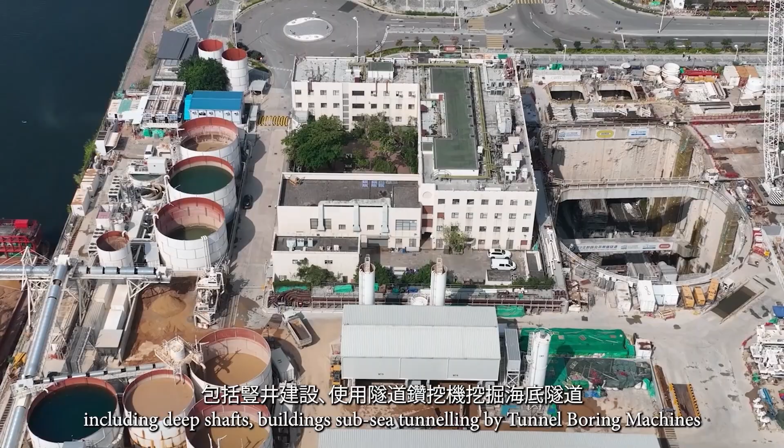The T2 project comprises 3.4 kilometers of dual tunnels and 2 ventilation buildings. It is complicated, involving a multitude of work types, including deep shafts, buildings, subsea tunneling by tunnel boring machines, and drill and blast, drill and break mined tunnels.

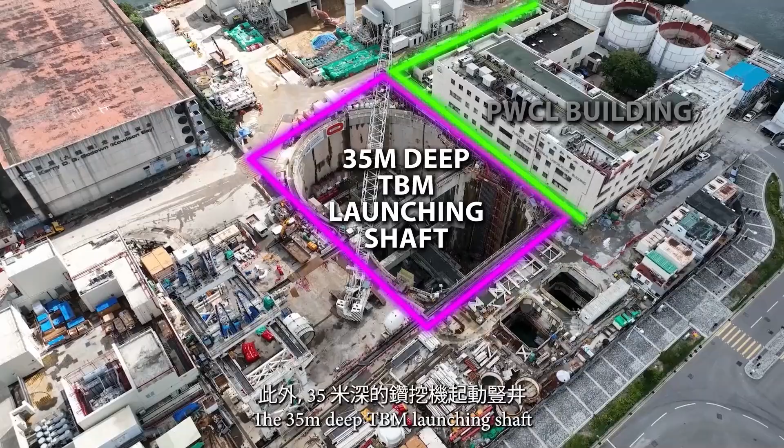It is also hugely challenging. The 35-meter deep TBM launching shaft is located less than 2.5 meters away from the friction piles of the highly sensitive Public Works Central Laboratory, and the mine tunnels are routed right under the sensitive Cha Kwo Ling village.

Traditionally, tunnel construction involves various in-situ works, like the concreting for the road deck, ventilation compartments, cross passages, and the like. These require intensive labor and plant resources in a congested tunnel environment, posing significant safety risks and logistic constraints.

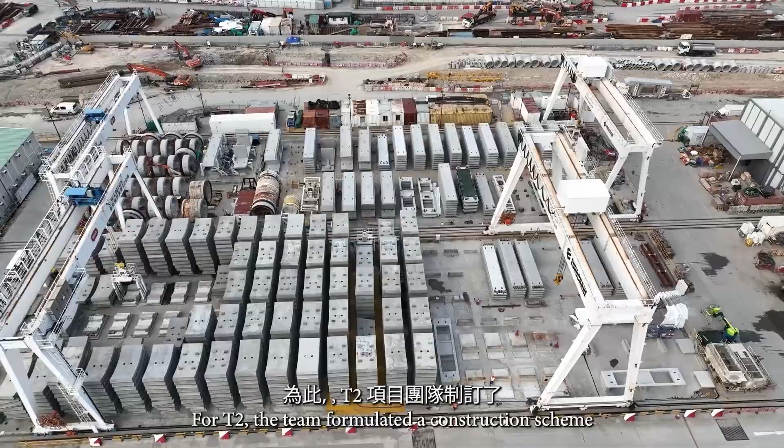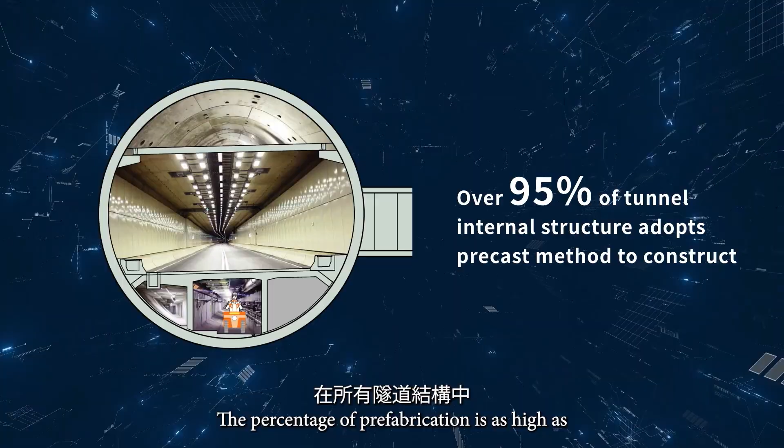For T2, the team formulated a construction scheme with a high degree of modularization. This is coupled with design for manufacturing and assembly, and fully mechanized and robotic construction. The percentage of prefabrication is as high as 95% of all the tunnel structures. Electrical and mechanical services are also installed in a modular manner through MIMEP.

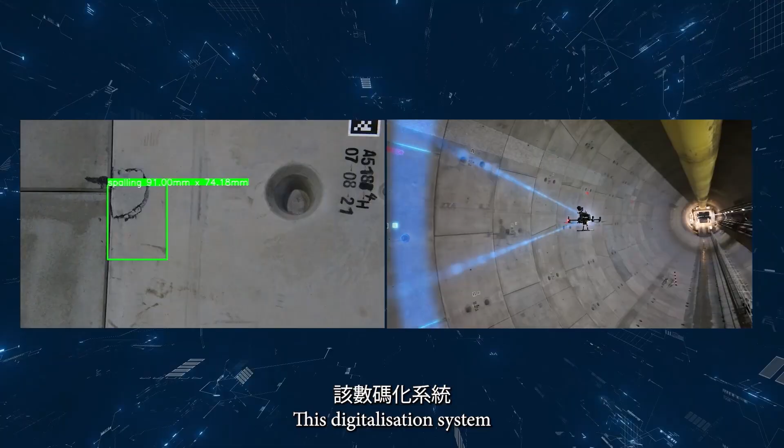In tandem, the project team sought out and integrated a range of smart and latest technologies to constitute a comprehensive digitalization system. This digitalization system and the extensive modularization work together synergistically to benefit not just the project delivery stage of design and construction, but also future operation as well as asset management and maintenance.

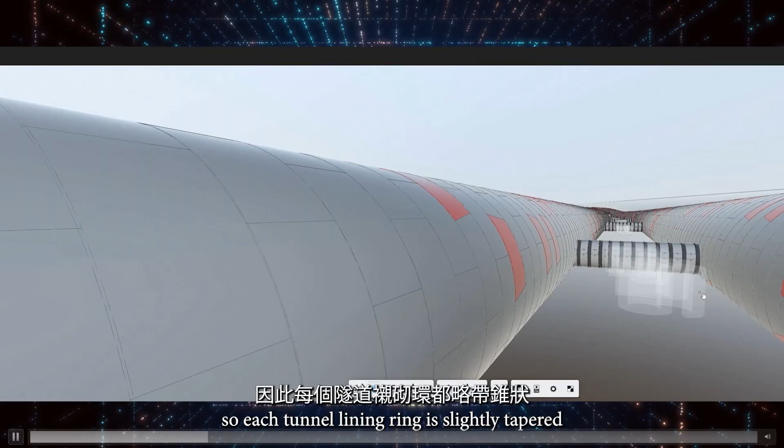First, let's look at how the digitalization system utilizes the digital twin for smart alignment control and clash-proofing of tunnel structures. Tunnel alignments are curvilinear, so each tunnel lining ring is slightly tapered. Change in tunnel direction is affected by relative taper orientations between 2 adjacent lining rings.

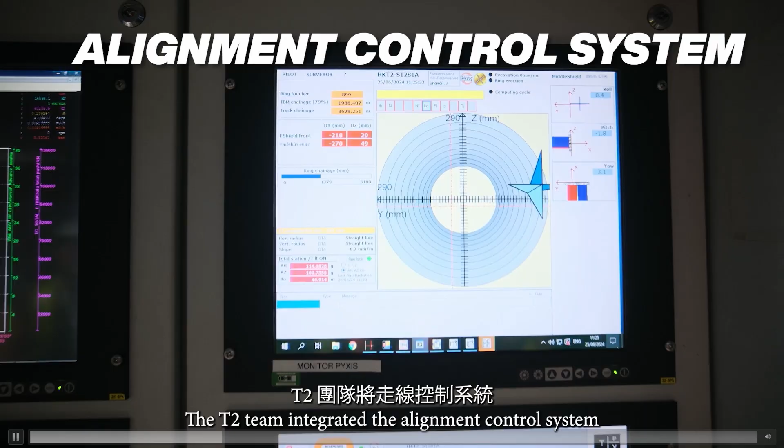The T2 team integrated the alignment control system and the BIM model to create the PYXIS Revit Python Dynamo automated design workflow. This automatically analyzes the as-built location of the latest installed lining ring and determines the appropriate relative taper orientation for the next ring.

Furthermore, it checks and affirms the spatial compatibility of tunnel internal structures to be installed in the latest erected tunnel ring, thereby eliminating the risk of spatial conflicts between the structures.

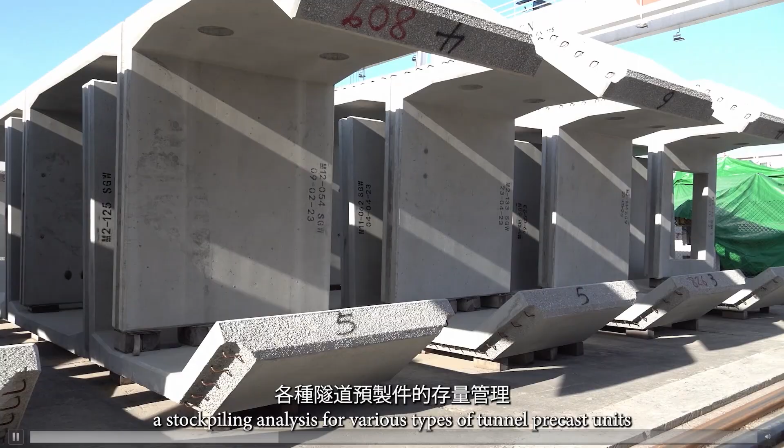Construction of tunnel internal structures are highly interlinked. The team developed a 4D Smart Progress program system integrating tunnel lining construction, a permit-to-load system for early-age concrete corbels, a stockpiling analysis for various types of tunnel precast units, and the MIMEP module tracking system.

By correlating data from the IoT, DWSS, and BIM model, the status of each major construction activity is visualized through the centralized management platform, whether it's ahead of, on schedule, or behind the latest approved program.

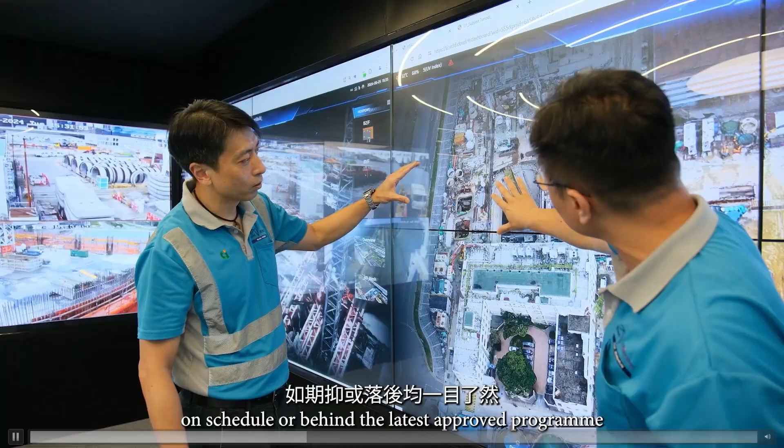Furthermore, the smart integrated system conducts analyses based on past progress to project upcoming works interfacing and resources requirements. To ensure efficiency, this avoids time loss due to supply shortages or inadequate preparedness.

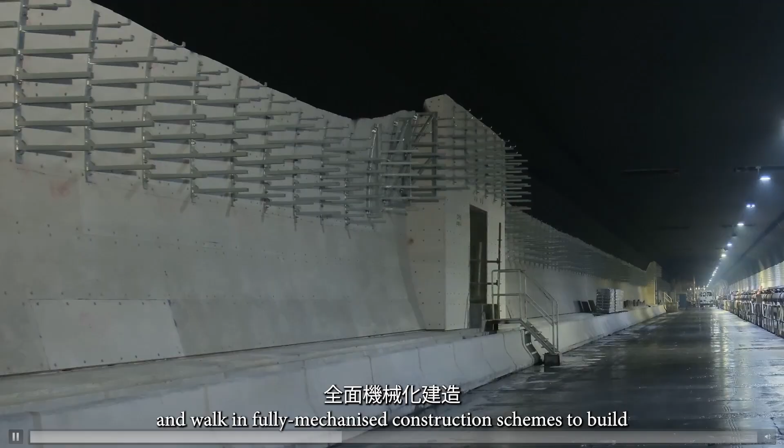The team leveraged the latest modular construction techniques and the design for manufacturing and assembly approach, and brought in fully mechanized construction schemes to build the road deck and service gallery structures, the overhead ventilation duct slabs and ventilation dampers, cross passages, and fire protection boards.

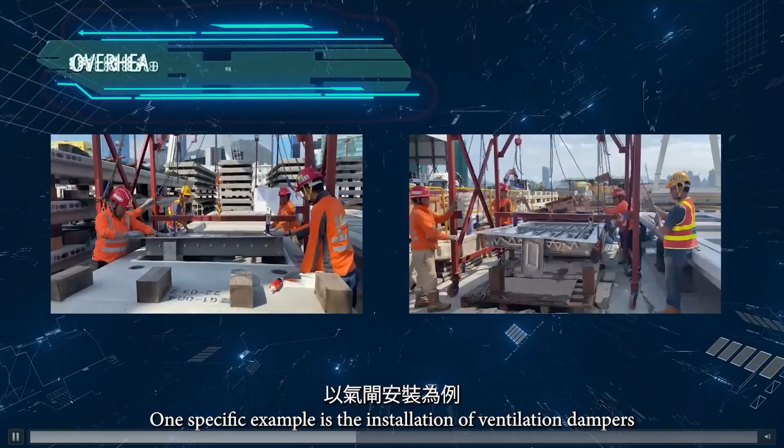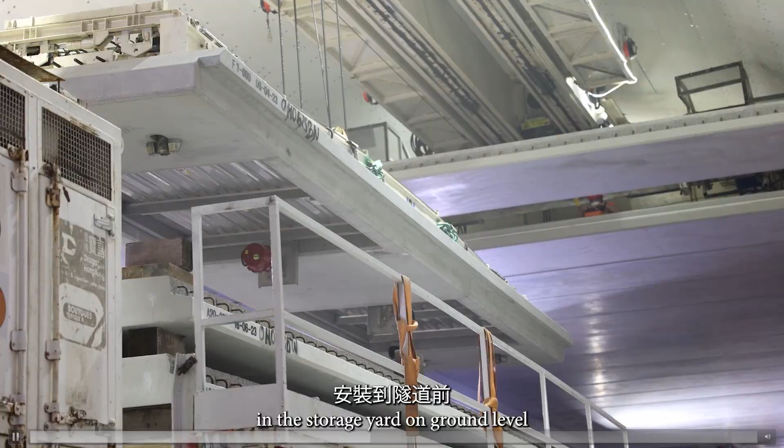One specific example is the installation of ventilation dampers. To minimize lifting and working at height risks, the dampers are pre-installed onto the slabs in the storage yard on ground level, before the slabs are lifted up and put in place in the tunnel.

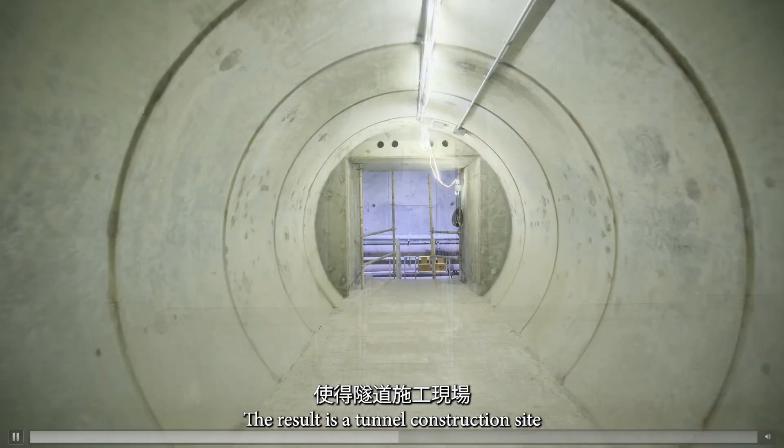These novel construction schemes empowered by the digitalization system increases the speed of individual construction activities and allow maximum concurrency of different work fronts along the tunnel, thus greatly enhancing productivity, site tidiness, and logistics. The result is a tunnel construction site that closely resembles a highly efficient industrial production line.

The BIM also allows construction method simulations before actual works take place to guard against any clash or conflict.

Occupational safety and health is always of paramount importance. To minimize working at heights and other such repetitive tasks, the team developed an innovative tunnel lining inspection technology called the 3S Tunnel Defect Inspector.

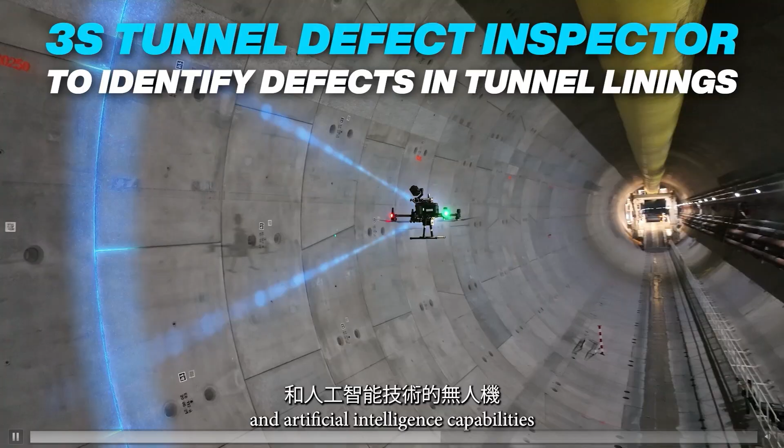This is a drone equipped with edge computing and artificial intelligence capabilities. It automatically identifies defects in the installed tunnel linings, like minor cracks, and uploads the full records including high-resolution photographs to the BIM model instantly to constitute precise digitalization of inspection records.

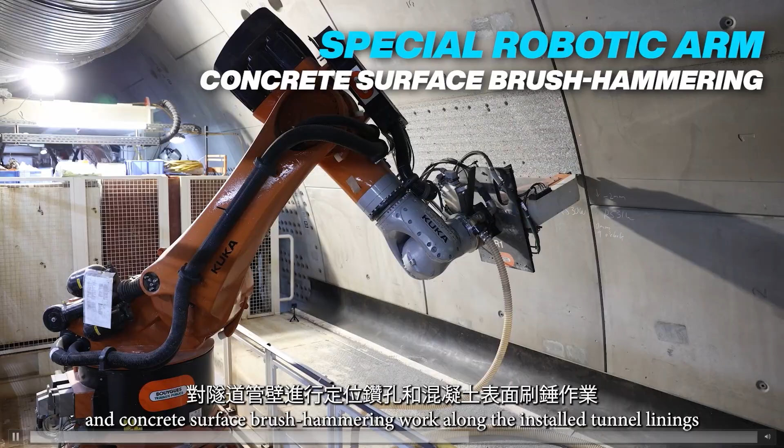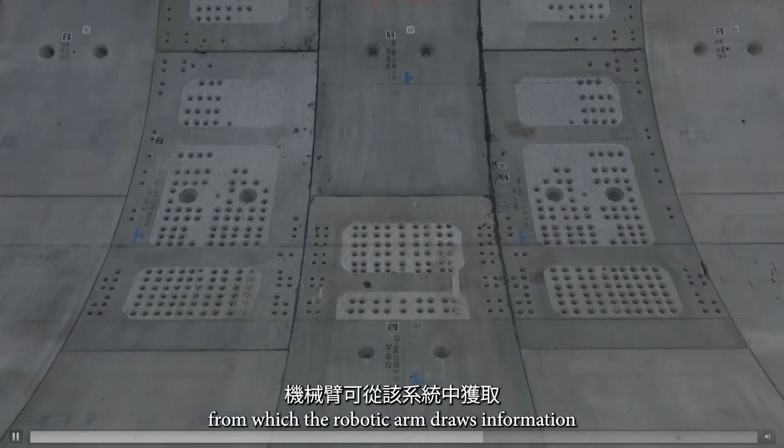Besides, the team brought in robotic construction for anchor bar hole drilling and concrete surface brush hammering work along the installed tunnel linings in preparation for corbel construction. This is enabled by the digitalization system, from which the robotic arm draws information about the location of the corbel. This digitalization-driven innovation once again eliminates the tedious manual work at heights.

Similar robots were designed for the drilling and installation of fixing bolts for MIMEP units of electrical and mechanical facilities, further enhancing work efficiency and safety.

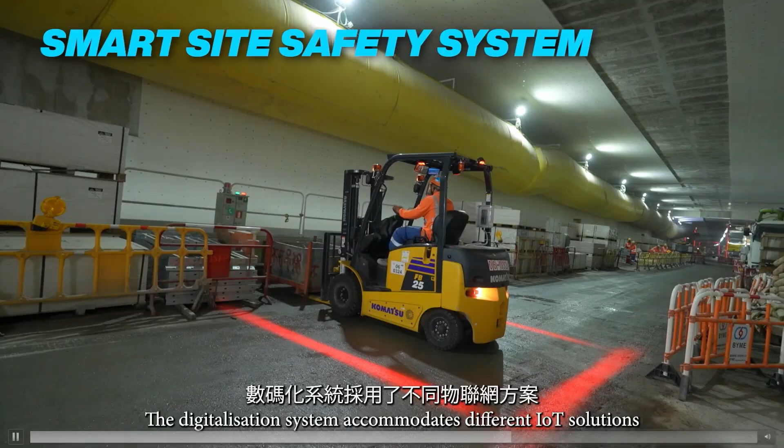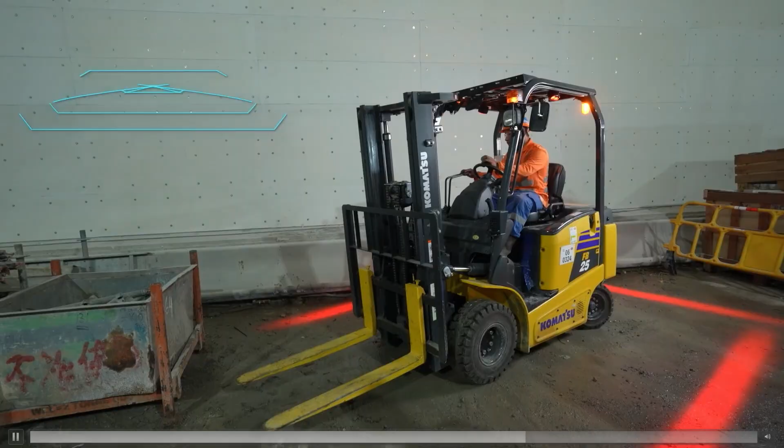The digitalization system accommodates different IoT solutions under the Smart Site Safety System, like AI cameras, smart tags, halo light for protection from moving plants, confined space monitoring, etc.

One particular measure is the Operator Biometric Authentication System that verifies biometric information of a plant operator remotely via the digitalization system to ensure he is an approved operator.

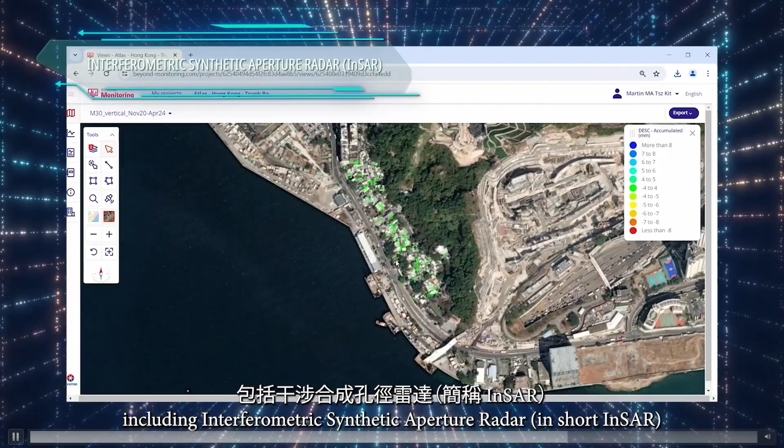As mentioned earlier, the T2 tunnels are routed extremely close to highly sensitive facilities. To ensure the effectiveness of impact mitigation measures, the team brought in remote sensing instrumentation technologies including interferometric synthetic aperture radar (InSAR), Global Navigation Satellite System, and 360-degree artificial intelligence noise monitoring. The information collected is fed into the digitalization system for continuous close monitoring.

Apart from providing continuous instrumentation and eliminating manual survey work, the clear digitalized records greatly facilitate communication with stakeholders, helping to foster mutual trust. The T2 project team leveraged the benefits of digitalization beyond project design and construction.

The aim is a digital twin of the whole tunnel, including both structures and equipment, that would greatly enhance operation, asset management, and maintenance. IoT sensors and multifunctional robots for preventative maintenance of various E&M services, energy consumption and efficiency monitoring, structural health monitoring, etc., are incorporated as part of the infrastructure to be handed over to the operation and maintenance parties. They are highly supportive of these initiatives.

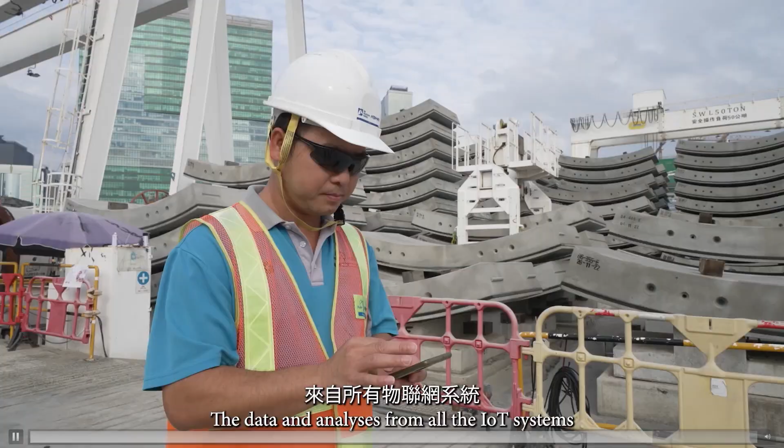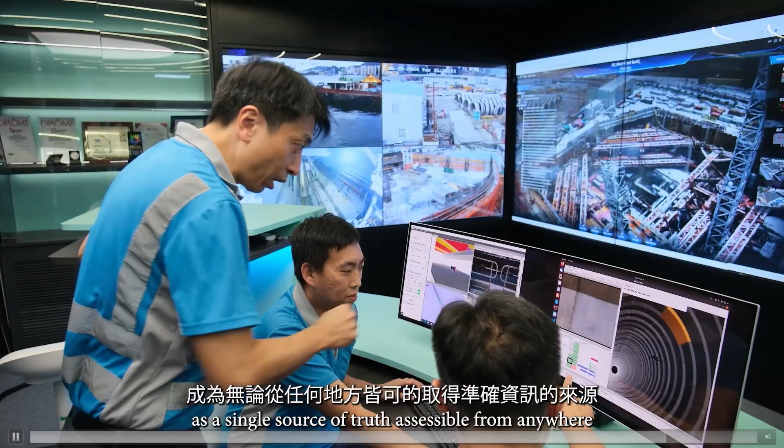The data and analyses from all IoT systems, BIM model, and DWSS are integrated into the web-based portal centralized management platform as a single source of truth accessible from anywhere, as well as feeding into the Development Bureau's ICWP for taking forward construction digitalization at the policy level.

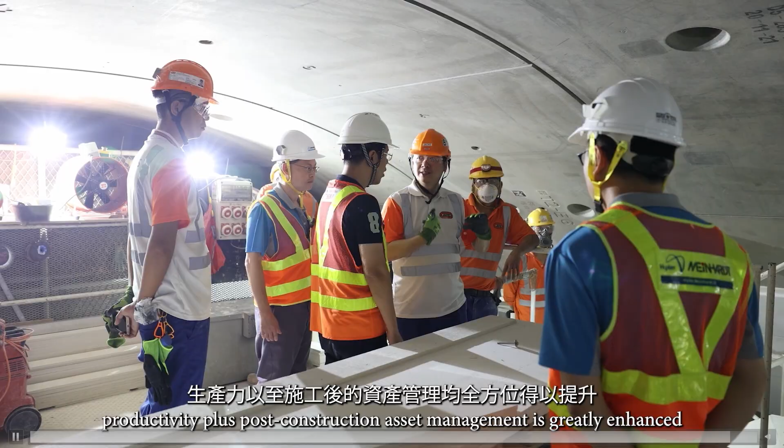In Trunk Road T2, we adopt various smart technologies. We've developed a truly comprehensive digitalization system. It enables the application of digital twin in numerous ways. In this project, the works are mostly delivered in modular units. Taken all together, project management, safety, quality, operational efficiency, productivity, plus post-construction asset management is greatly enhanced. CEDD will continue to leverage the benefits of construction digitalization. Surely, T2 will lead the way to take forward these worthwhile initiatives.

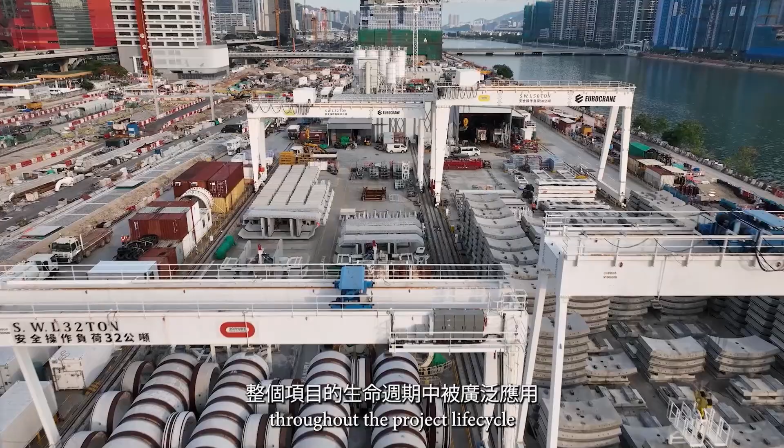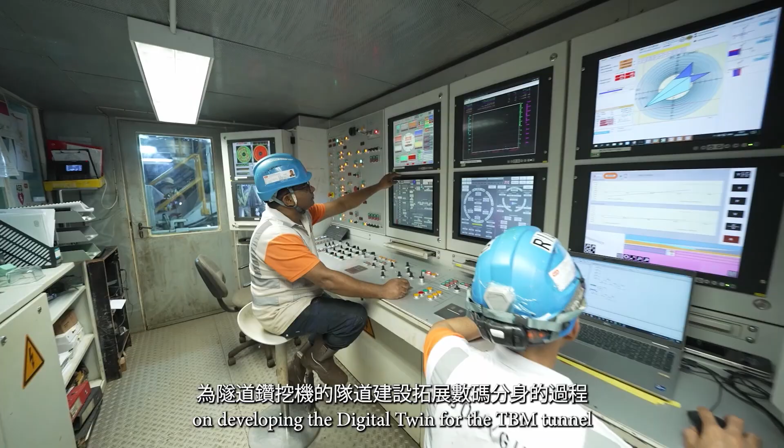This workflow is the key to achieve progressive as-built and projection of tunnel design and construction. We will also introduce the IoT solutions that reflect existing real-time conditions on site with visual analysis to assist making necessary timely decisions.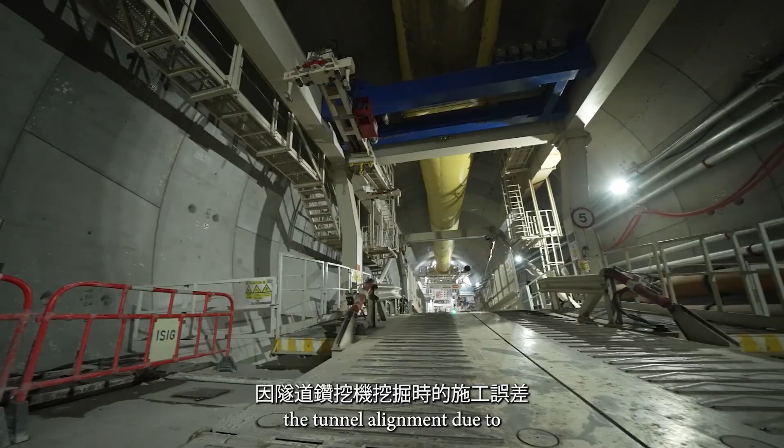At the design stage of the TBM tunnel lining, each tunnel ring was segmented into 9 sections. The position of the key segment K9 dictates the tunnel direction and can accommodate all curvatures in the tunnel. It also helps to adjust and correct the tunnel alignment due to the construction tolerance of TBM excavation.

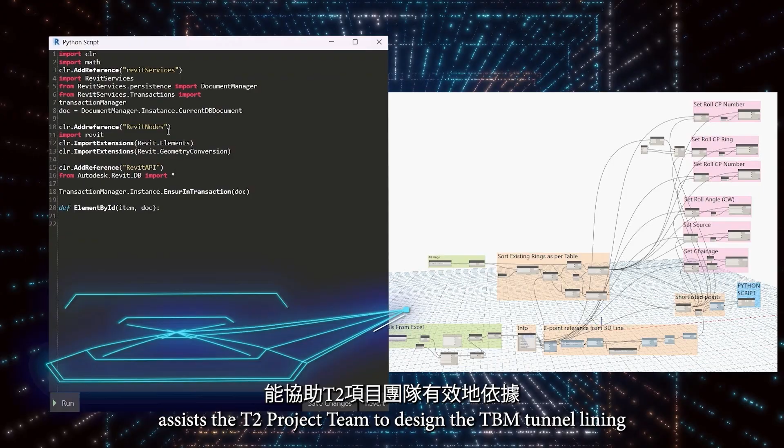With parametric constraints and boundary conditions, the parametric design with DynamoScript assists the T2 project team to design the TBM tunnel lining and its internal structures effectively, with reference to the design tunnel alignment. The design could be iterated easily and promptly by changing the design axis. The designed BIM model would then be used for generation of the construction drawings.

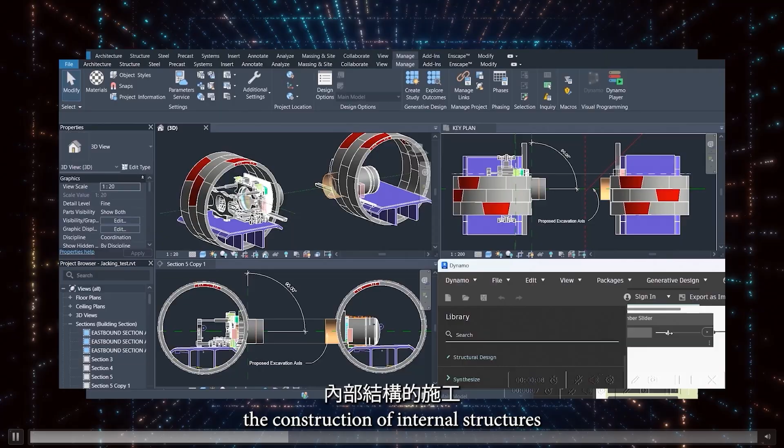With reference to the design tunnel alignment, which is a fundamental component of the BIM model, the TBM pilot could start tunnel excavation. A critical challenge is that tunnel misalignment during excavation may occur and accumulate. If the tunnel was continuously misaligned and deviated cumulatively and significantly, the construction of internal structures and the positioning of the cross passages, in particular, would be adversely affected.

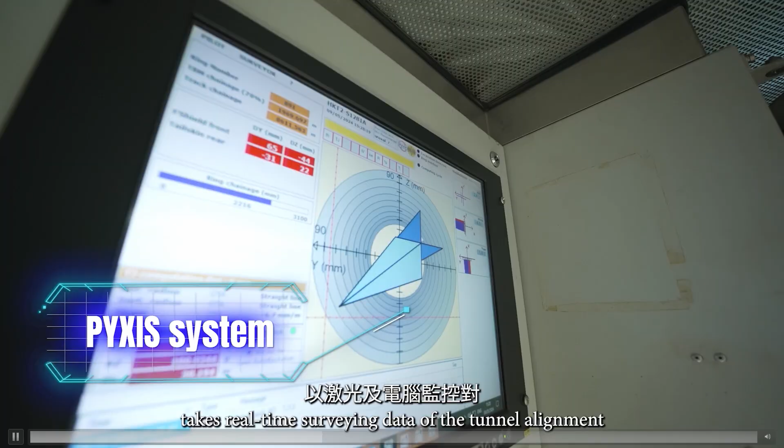Therefore, the project team must keep a close eye on the as-built data. The tunnel guidance system PYXIS takes real-time surveying data of the tunnel alignment with lasers and computer monitoring. Utilizing Dynamo, a visual programming tool, the measurement data collected by PYXIS are directed to Revit by Python scripts. This enables the existing condition modeling so that the as-built BIM model could assist the project team to visualize any deviation from the design model and promptly alert the engineers to deal with it accordingly.

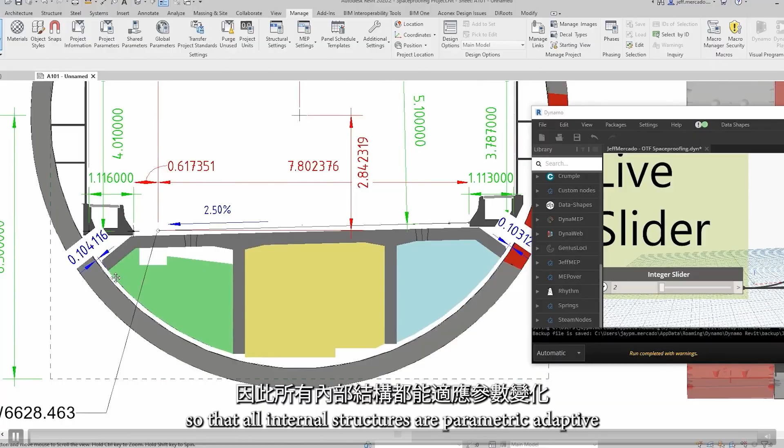If minor deviation occurs, the project team can utilize the Dynamo program and Python script further to execute automated spatial coordination to resolve clashes of internal structures in Revit. Clear logic was defined so that all internal structures are parametric adaptive. Just by scrolling through the chainage, the dimensions and parameters, for example the offset coordinates of the internal structures, could be generated automatically. Hence, a progressive as-built and projection working cycle is developed.

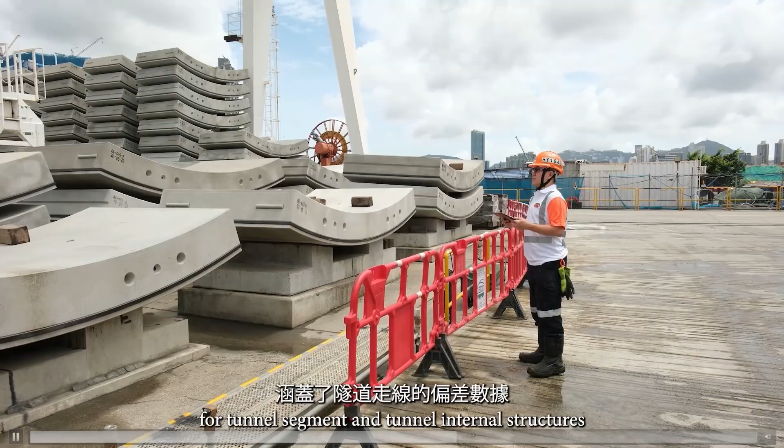Again, the revised construction drawings for tunnel segment and tunnel internal structures based on latest as-built tunnel alignment with tolerated deviation could be generated for use on-site.

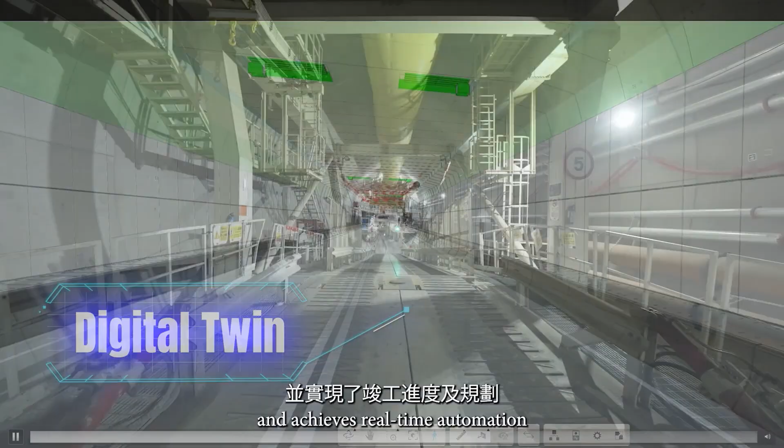This progressive updated BIM model served as the basis of the digital twin and achieves real-time automation with an as-built progress and projection approach. It significantly reduces the modeling time for 100 internal structures from 100 hours to only 2 hours. The accurate and precise as-built model enables engineers to carry out site analysis.

At the cross-passage location, special main tunnel segments are reinforced by glass fiber reinforced polymer to form a soft eye, allowing the mechanized mini TBM to bore through the main tunnel concrete lining to excavate. The cross-passage engineer would reference the as-built BIM model to determine the optimal location, position, and orientation for construction, ensuring the mini TBM starts at the soft eye in the launch tunnel and ends at the soft eye in the adjacent main tunnel.

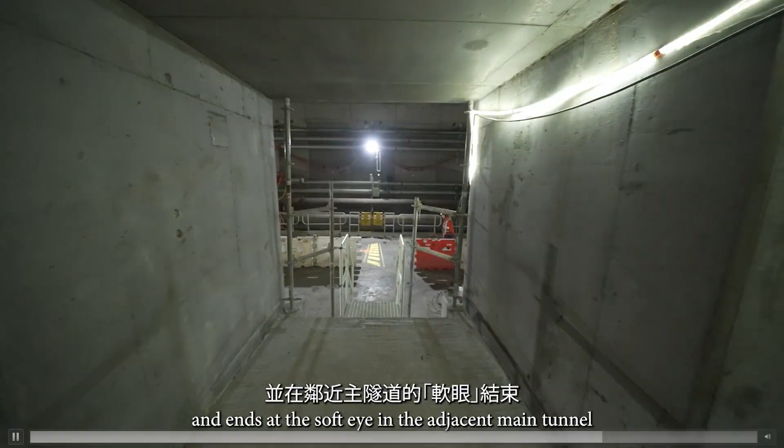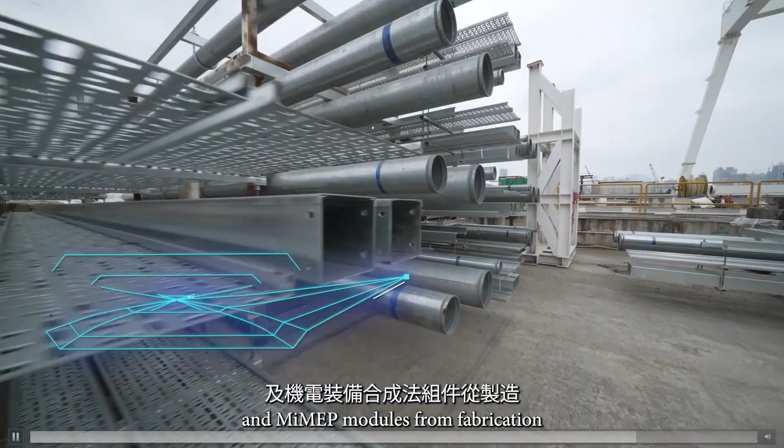Other than BIM adoption, IoT solutions and digital tools are other stepping stones towards the digital twin. The T2 project team adopts digital tools and IoT smart tags to track precast tunnel elements and MiMEP modules from fabrication, through transportation to final installation in the tunnels. Hence, a 4D phase planning could be generated in the construction sequence simulation in the BIM. The IoT system also offers potential to carry out site analysis by evaluating production rate, delivery rate, and installation rate to facilitate better planning of works.

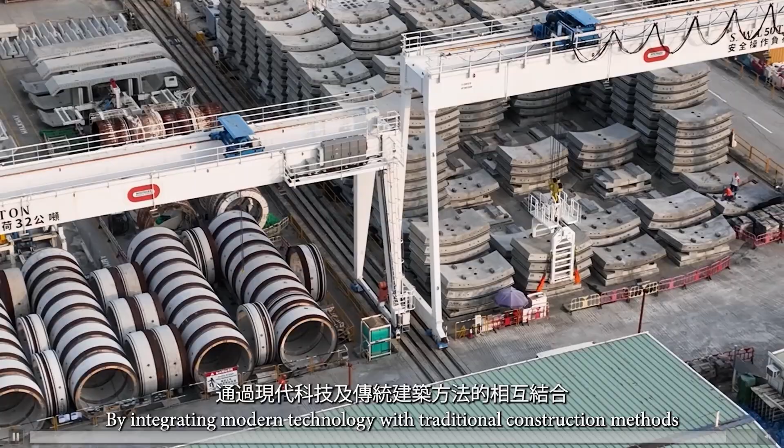In the T2 project, BIM technology has demonstrated its immense potential in architecture and engineering, particularly in enhancing efficiency, accuracy, and decision-making support. By integrating modern technology with traditional construction methods, the T2 project has not only achieved high-quality infrastructure, but also propelled the future of digitalization and intelligence in the construction industry.

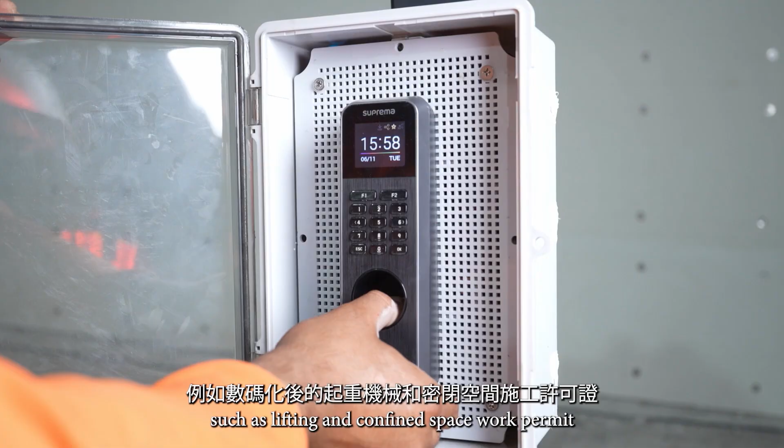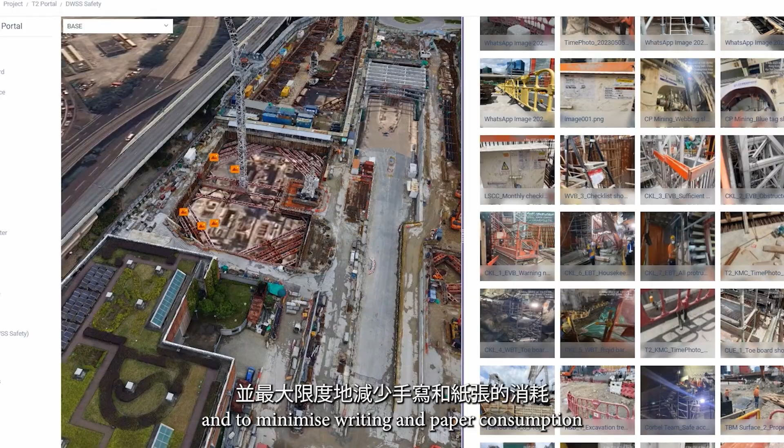We digitized the permits to work procedure in the T2 project, such as lifting and confined space work permits. Electronic permits allow us to record multimedia information like site photos and videos, and to minimize writing and paper consumption. This also streamlines the approval process and ensures an instant view of permit status in CMP, strengthening the site's supervision capability.

That sounds great. It seems like these measures are mostly on the supervision side. Are there any measures taken on site? Of course there are. Wear your PPE and follow me. I will show you. Awesome.

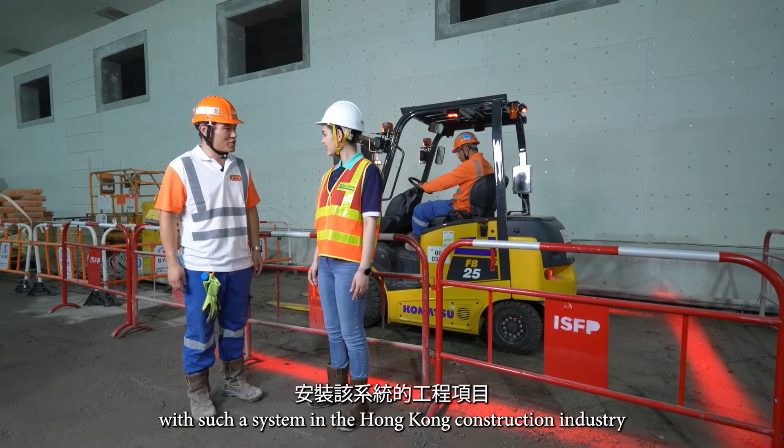What's this device attached to the machine? That's the operator biometric authentication system. T2 is the first project to equip moving machineries with such a device in Hong Kong's construction industry. Machines and plants installed with the system can only be activated by the fingerprints of authorized personnel. This can prevent unlicensed operations.

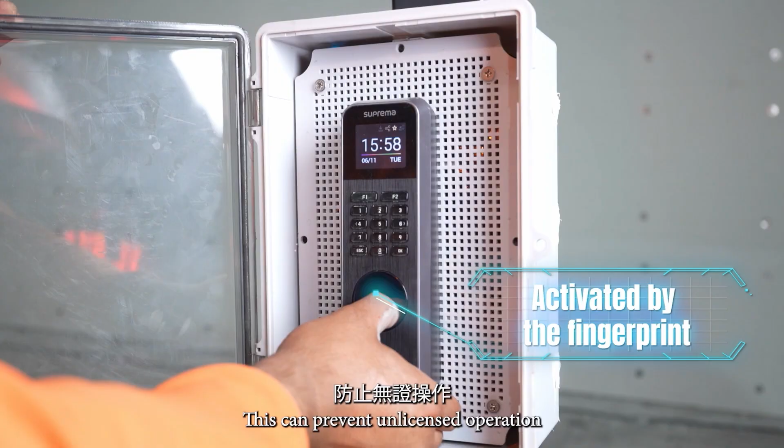Applying IoT technology, this can enable managers to manage a remote fleet in real time. To give you a real-life example, we will suspend the permissions of an operator to start up machineries in case of expired licenses, unsafe operations, or mandatory repairs. The system keeps detailed records of usage, which can be used for incident investigations and data analysis when needed.

Very impressive. Let me see if my finger can start the machine. Oh, it doesn't work. I've told you so.

Anything special about these cameras? These are no ordinary cameras. We have adopted various kinds of AI camera on site.

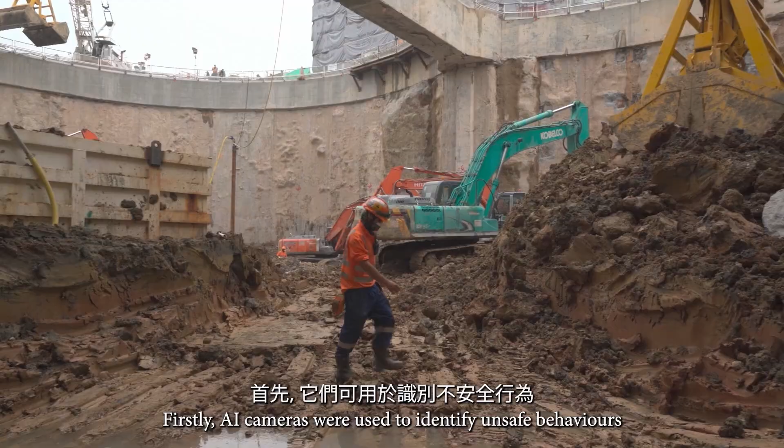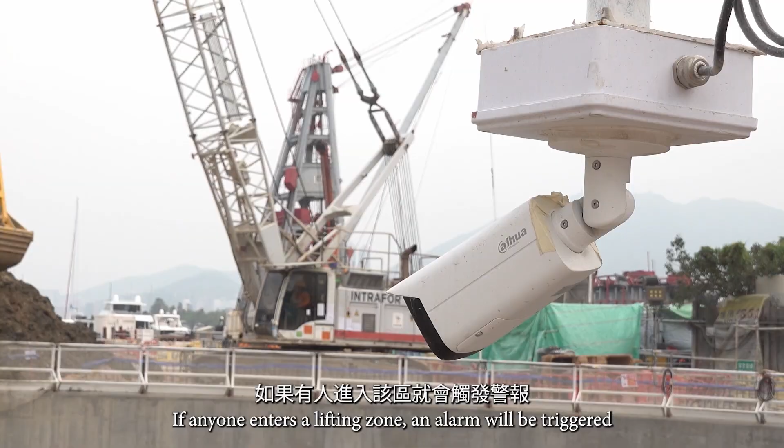Firstly, AI cameras were used to identify unsafe behaviors, like the misuse of PPE or smoking. Secondly, they can monitor the lifting zone. If anyone enters a lifting zone, an alarm will be triggered. These unsafe acts will be recorded and sent back to the CMP. We have successfully spotted repeat offenders after analyzing these records, and have been able to correct their behavior.

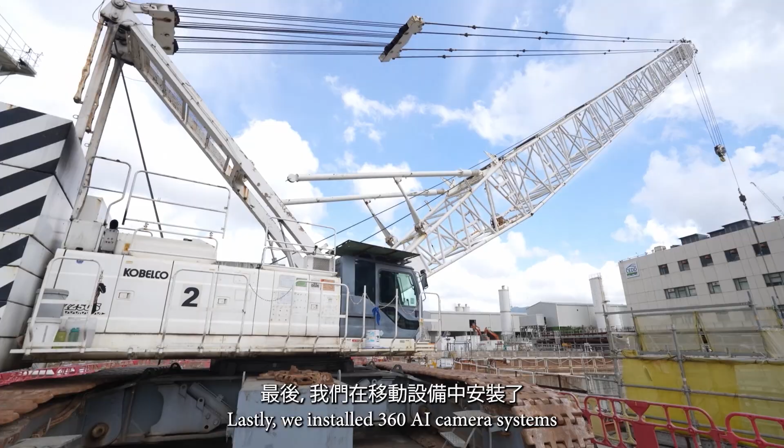Lastly, we install 360 AI camera systems on multiple machinery. It gives the operators a panoramic view of all blind spots. An alarm will sound when workers or anybody else is detected in the operating range of the machinery.

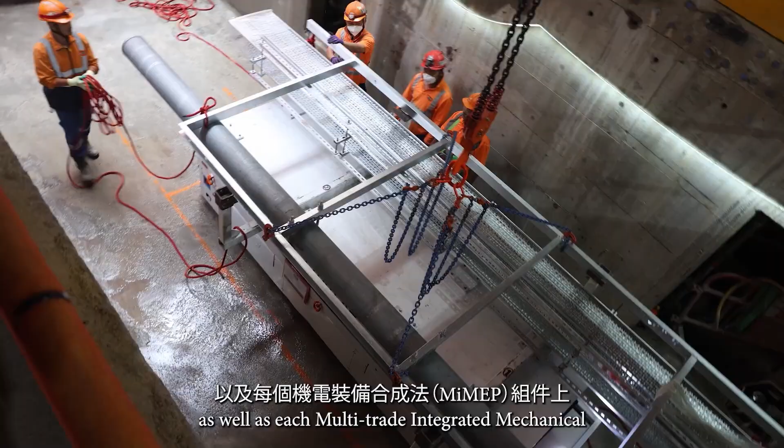Do you know what these devices are and what they are used for? I've seen these before. They are smart tags. Smart tags with tracking have been installed on all major moving plants, as well as each multi-trade integrated mechanical, electrical, and plumbing module, in order to facilitate real-time tracking from the assembly yard to site installation. Logistics management thus becomes more efficient as all modules are now traceable.

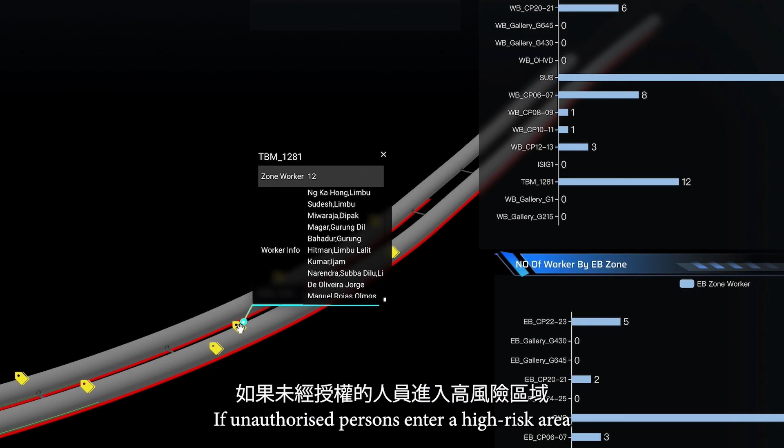Okay, what else can the smart tag do? I know, tracing people. All T2 workers in the tunnels are equipped with smart tags, allowing the location and number of people to be monitored in real time. In case of emergencies, timely action can be taken to assist the rescue. If unauthorized persons enter a high-risk area, an alert can be issued immediately.

Well done! Is there anything else you know about our safety measures? That's not all I know. I also know T2 makes use of VR training to greatly raise worker safety awareness. The successful implementation of the 4S Smart Safety System relies on the collaborative efforts of various stakeholders. T2 will continue to strive for excellence in safety.

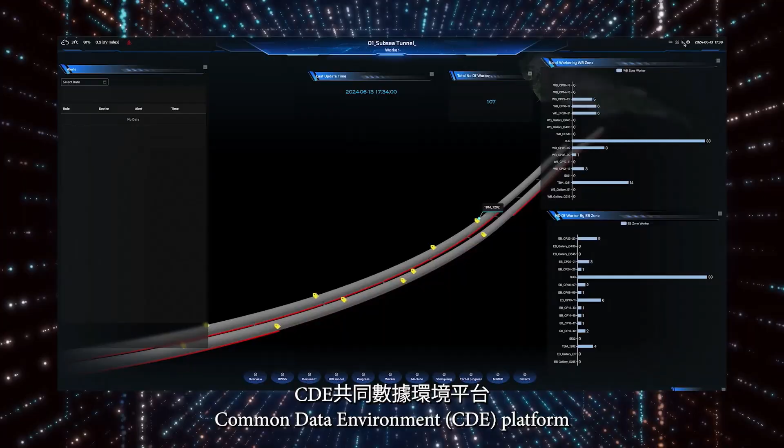T2 project team has been actively exploring innovative technologies and developing a common data environment platform for digital integration of project data since 2021, with reference to ISO 19650. The implementation has significantly improved the workflow of the project and enhanced its quality, safety, and sustainability. The project team utilized the CDE throughout the project lifecycle.

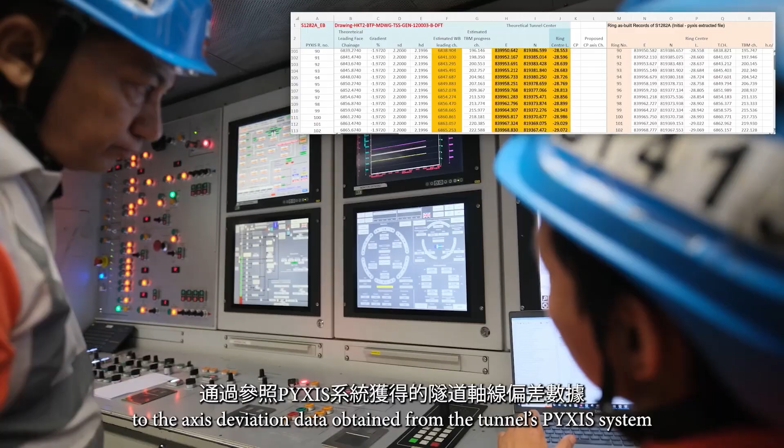During the design stage, the project team used automation for TBM structure design to generate and revise the design. Designers can make constant adjustments to the internal structures and lining design with reference to the axis deviation data obtained from the tunnel's Pyxis system to ensure that the alignment was precise.

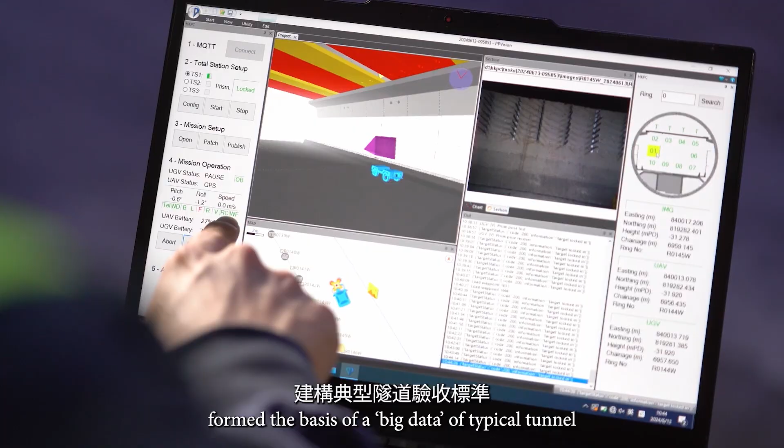During the construction stage, the CDE was used for inspection, progress monitoring, and safety management. The project created the world's first AI defect inspection system. Data such as high-resolution photos form the basis of a big data set of typical tunnel acceptance criteria and defects, sustaining the evolution of the dataset for use and enhancement by the project team and other similar projects.

For progress monitoring, the team utilized precast element stockpiling analysis to enhance construction planning and review. A unique QR code is designated to each precast concrete segment to track its location and status. Automatic stock projections for the next two weeks according to construction progress were made possible thanks to the system, helping to ensure adequate stock.

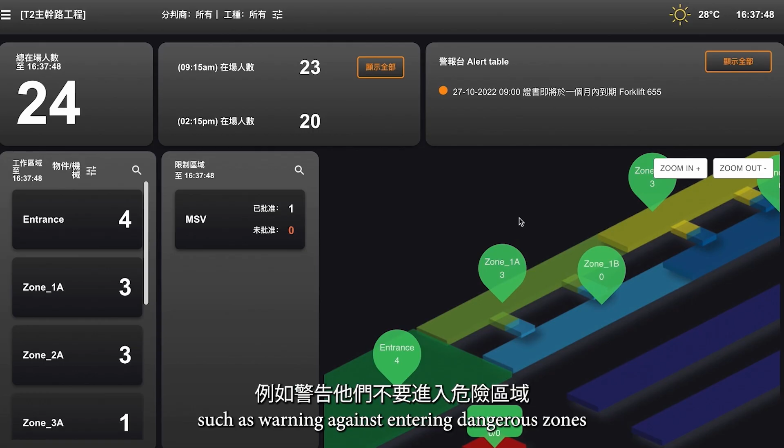Moreover, smart tags for workers were deployed to monitor the location of workers in confined spaces for further protection, such as warning against entering dangerous zones. The system provided data such as the number of workers and man-hours per day to assist staffing arrangements.

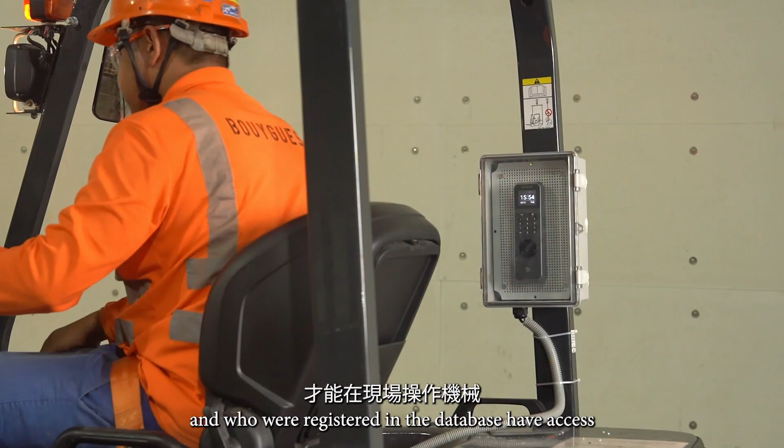For safety management, the operator authentication system restricted the operation of machinery on site, so only those who were trained and qualified to operate it and who were registered in the database have access. The equipment usage was also recorded for optimizing machinery resource allocation.

The team has also adopted InSAR monitoring techniques for remote monitoring of ground settlement. The database can keep track of the tunnel excavation impact on surrounding buildings and structures so that the project team could take immediate action in case the settlement exceeds the allowable limit.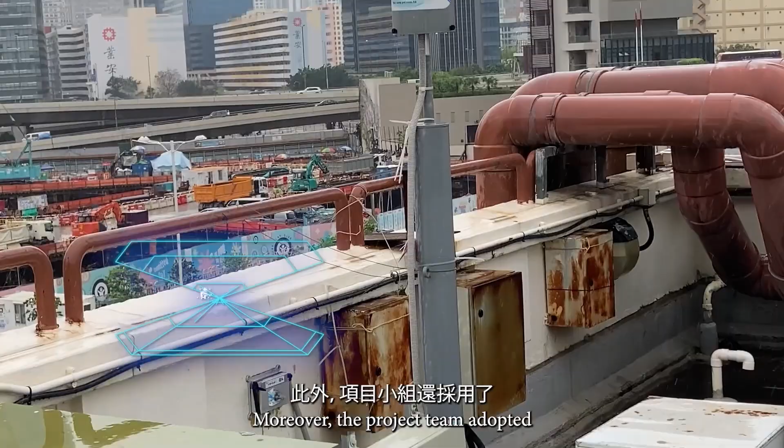Moreover, the project team adopted the Global Navigation Satellite System to monitor the movement of the sloping seawall at Tai Koo Ling. Through continuous 3D movement readings for precise location monitoring, the system would alert the project team if the movement exceeded the allowable limit, thus further enhancing the safety management.

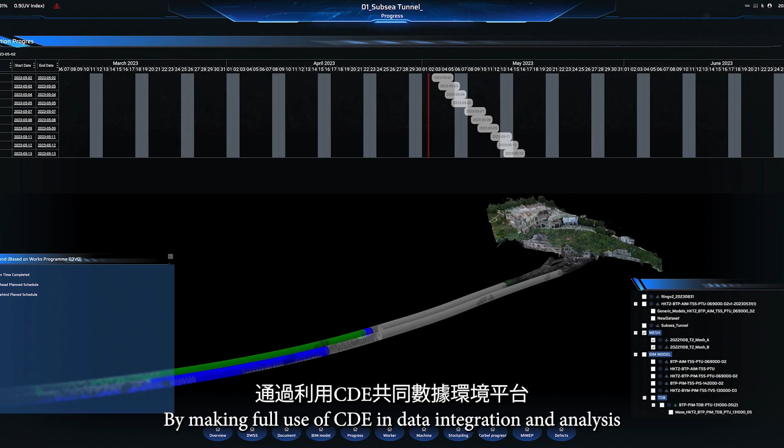During the asset management stage, the application of the digital twin helps the maintenance authorities to closely monitor multiple aspects of the trunk road. For example, in case of any equipment or system failure or accident happening inside the tunnel, the operators will be immediately notified. Furthermore, the digital twin allows the operators to test and optimize existing and future systems without adversely affecting the public road users. By making full use of CDE in data integration and analysis that covers the entire project lifecycle, the T2 team is fully devoted to promoting knowledge sharing and technological advancement for the construction industry.